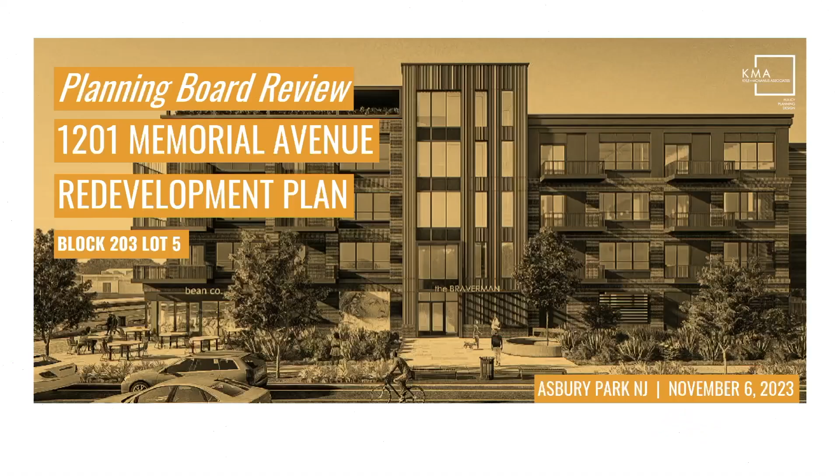Okay, here we go. So the property, as I said, it's a single lot. It principally fronts on Memorial Drive, consistent with the name of the redevelopment plan.

There it is. Okay. Try to make things a little bit more sensitive. Keep it exciting. Okay, here we go again.

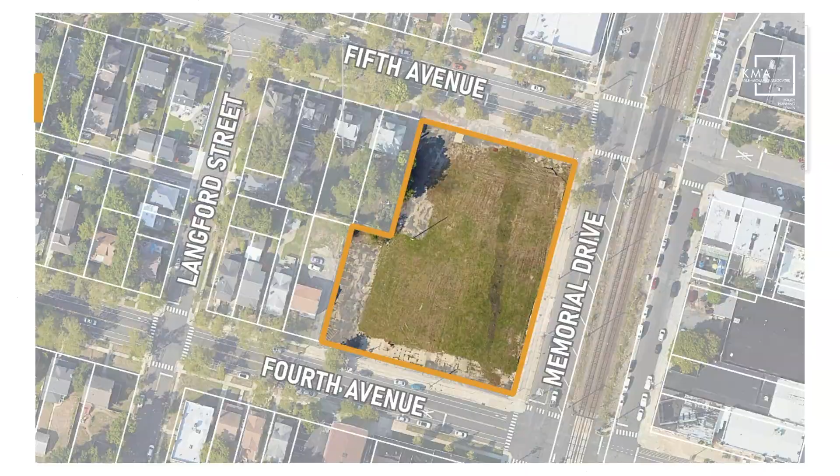Single site, fronts on Memorial Drive, but as you can see in this plan, this map, it also has frontage along two of the side streets, 5th Avenue and 4th Avenue. The redevelopment plan is principally concerning redevelopment of the site with a single building, and included in the redevelopment plan are a number of objectives that I'll go through in short order. But essentially it is to promote redevelopment of the site.

This is a long vacant property on one of the city's primary corridors in town, Memorial Drive. We are also seeking to create diverse housing opportunities, and by that, it's really in reference to the affordable housing included on the property, which is a 20% set aside, with the remaining 80% being for market rate.

Additionally, we're also looking to promote economic development in the city, using mixed-use development and emphasizing residential development in this particular location so that it can help feed the commercial businesses here in the city. Although I will say, and you'll see later in the presentation, that the site does include a mix of residential as well as commercial uses.

Additional redevelopment plan objectives are to maintain their overall character and try to limit impacts on the surrounding single-family neighborhood that's located largely to the west of the property. We're also looking to create a unique sense of place on the site using interesting architecture. There's also an incorporation of public arts, and you can see that listed or referenced in the 6th objective.

So the general provisions, before we get into the details about development. First, the redevelopment plan has been prepared for the developer that the city has been engaging with. And it's anticipated, but not done, that developer will be the designated redeveloper, and it is only that designated redeveloper that will be able to proceed with the project.

Furthermore, any site plan application that comes before all of you must include the entire redevelopment area, so there's no opportunity to subdivide and parcel off the redevelopment area. And the purpose of those two provisions, as well as some of the other terms in the redevelopment plan, is really to guarantee certainty.

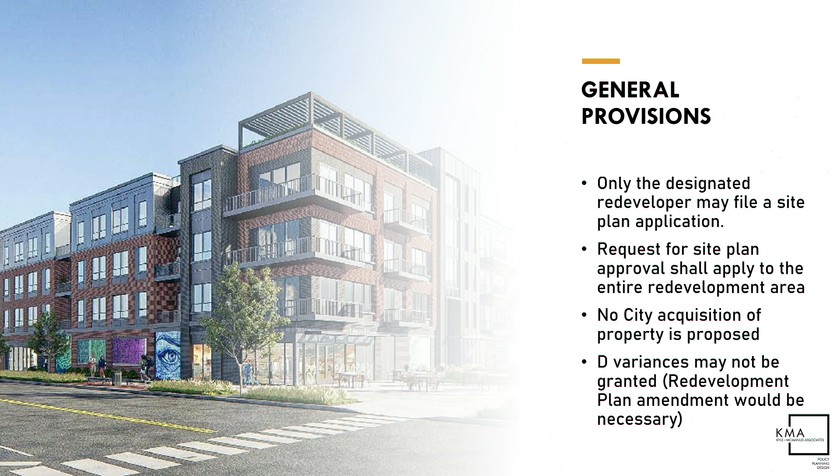The redevelopment plan, when crafted, was really intended to be a specific project that addresses certain concerns that have been raised by the public and raised by the council. And so this provision that it must be the designated redeveloper, plus it must be the entire redevelopment area, is intended to give as much certainty as to what this project will be as possible.

Also, I want to note that there's no acquisition of property that's proposed by the city. And another way that certainty is built in, and another limitation that's set forth in the plan, is that any redeveloper is not permitted to come in with a D variance. So that means there's no height variance that would exceed 10%, that would be a D variance height.

There's no prohibited use that would be permitted, even through the variance avenue. Instead, a developer would have to seek an amendment to the redevelopment plan. So it's a very strong term in those regards.

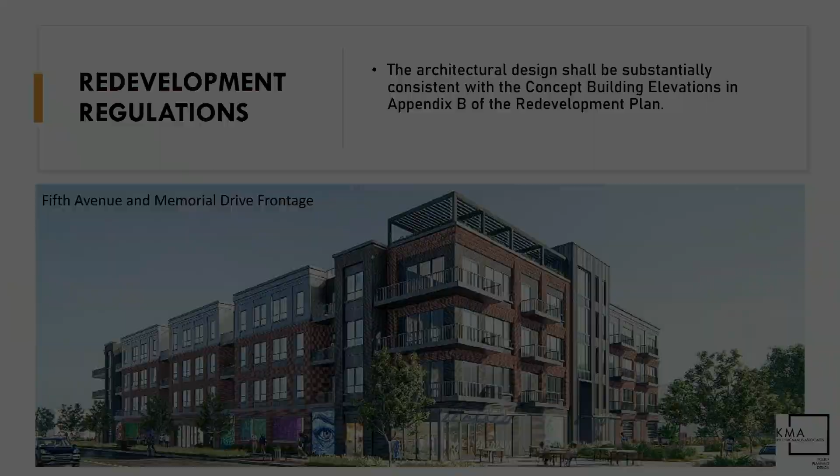Here we have another view of the building. This is the 5th Avenue and Memorial Drive frontage. I think what's noteworthy here is you can see those same parts of the Memorial Drive frontage I just referenced, but you can also see the primary person entrance along 5th Avenue. And here is a better, more direct view of that 5th Avenue frontage.

In terms of the redevelopment plan text for regulations, for permitted uses, we have first floor non-residential uses. They need to be consistent with the permitted uses of the B district. The B district permits a variety of uses, things like retail, personal services, convenience stores, business and trade schools, fitness clubs, laundromats, dance studios, similar instruction schools, etc. So really a pretty wide variety of commercial uses are permitted in those retail areas.

Also permitted on the first floor are accessory residential uses such as the lobby, mailroom, utilities, etc., and of course parking. For the upper stories, the permitted uses are pretty straightforward: those apartments I referenced, up to 130, as well as any residential accessory uses the developer might like, such as amenity space.

Additionally, for the regulations, I have a summary of what I think are some of the most critical aspects of the plan. First and foremost, we have a 20% set aside of affordable housing. The developer will be providing more than 26 affordable units reserved for households with low and moderate incomes. All of those affordable units will be compliant with the city's affordable housing ordinance and will be eligible for credit against an affordable housing obligation. So that's a minimum of 26.

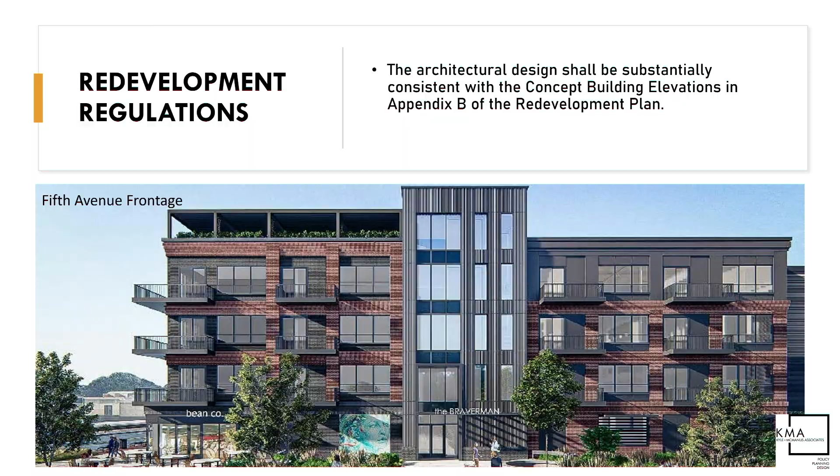Okay, and I should note that there's a— No, that's Fifth. Yeah, that's Fifth. And I should note that the vehicle entrance, I didn't say that, but just so folks are clear, the vehicle entrance is from Fourth, just as a side note. The vehicle entrance is on Fourth, this is only— Yeah, so what you see here is the people entrance, so to speak. Let me show the concept plan. There we go.

If I may paraphrase for Chairwoman Kurzak, you're talking about the canopy over the 4th floor? No, not the canopy, what's next to it. Oh, that's the stair overrun. So if there's a certain amount of feet over the canopy... Well, the canopy is over 48 feet as well. So that's even higher than the canopy. Could you go to the other view, the Fifth Avenue one? This is where 48 feet is. So this is your stair overrun and penthouse level, and this is the canopy.

Those are all above 48 feet. I'm speaking specifically of compliance, trying to understand what's over 48 feet. So the requirement is 4 stories, 48 feet, excluding penthouses. Penthouses may not be more than 20% of the roof area of the building, and may not exceed a height of 12 feet. So now we have the penthouses on the right, and the part on the right is even further than 12 feet, because you've got the penthouse up in the center, which is even higher than the penthouses.

No, these are not the penthouses. You don't see the penthouses? The green on the left, those are penthouses, I'm assuming. Is that true? That's just an outdoor canopy. Okay, no matter what, the outdoor canopy is higher than 48 feet, correct, and the center is much higher than 48. Is that normal in a B district, or is this an exception?

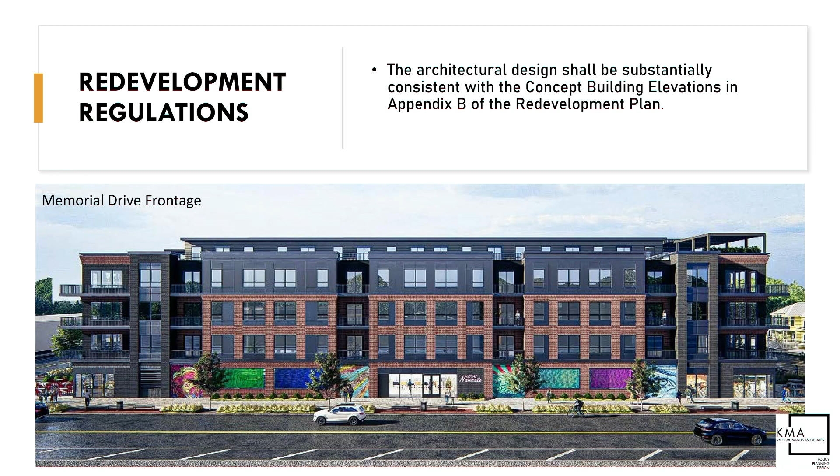Right, but I think what we're talking about is that it's hard for us to tell what this really is, because the concept here is different than what we have here - which is the layout of the first floor. It's hard to tell the difference because it looks different. Not necessarily that there are three retail spaces, but where are the sidewalks, where's the greenery? It's hard for us to tell that. It's not that we're asking for something different, we're unsure. You need a more well-developed plan to consider.

So I think you want to give yourself the flexibility in site plan approval to say, here's how this sidewalk should work to support those uses. Agreed. Is there an elevator in this building, and if so, where is it located? That's not yet been determined - it'll be subject to site plan and building code.

Okay, well, based on what we had up there a minute ago, it seems like there isn't much room for an elevator. I don't know where it would go along this thing, but you have this area pretty well earmarked for other uses.

What they are, I couldn't read because the printing is too small, but it's my understanding that building code requires an elevator for 4-story buildings, and I would imagine the developer will be required to comply with the building code. Yeah, anything over 3 stories requires it.

But the problem I have is it's not shown on the ground floor plan that I can determine. It's right above the lobby, just west of the lobby, that little square. Yeah, it's the stairs for sure, and the other one looks like what I assume. It's hard for us to tell, but that is my interpretation - one is the stairs, and this is probably the elevator, because you can see the doors.

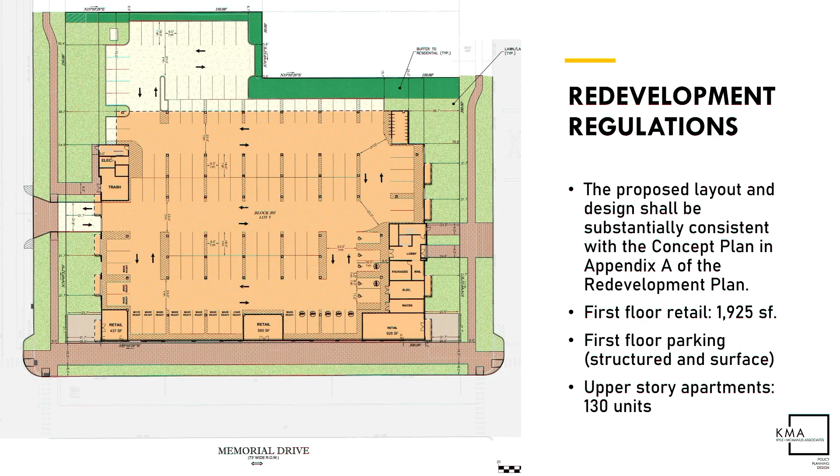So the back of the building is open on the bottom floor for the parking lot, and those last two spaces under the building are kind of outside. Is there a wall, fencing, or bushes between the parking lot and the sidewalk, or is it all visible and accessible? No, I would anticipate there'll be landscaping. The concept plan doesn't include the proposed landscaping—it's not intended for that purpose, plantings etc. So it's not shown, but that'll be subject to site plan approval by the planning board.

Going back to streetscape furnishing, are you saying it'll be up to the site plan approval stage if we want to talk about scooter parking, benches, and bike racks? Yeah, absolutely. Is there something that says the planning board has the power to impose those? Let me find this... Including, but not limited to... shall be provided along all streets. I want to make sure I can point to it and say yes, we can do this. It specifically requires it along Memorial Drive in particular.

Does anybody else from the planning board have any other questions? I just have one more that I thought was a little unclear.

G.3 says 60% of non-residential uses on Memorial must be transparent. When I first read that, I assumed it included the parking garage, since parking is non-residential. But looking at it, that's obviously not the case—it's really just the retail spaces that are transparent. So I'd recommend the wording be made clearer, that it doesn't include the parking. Yeah, I'm happy to make that change—that's not the intent.